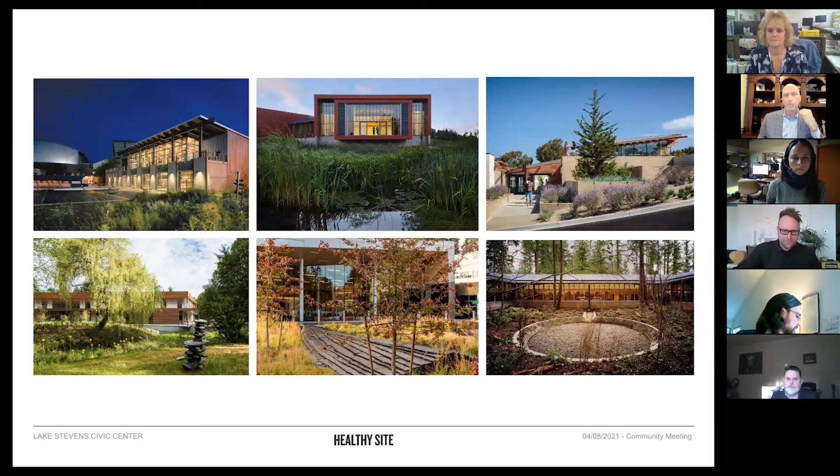And then finally, before I turn it over to Emily for a minute - how can we really open these buildings up, the library, the Civic Center, City Hall, for really 4-season use, at least into the shoulder seasons, fall and spring? How can we be outside under cover and enjoy that Pacific Northwest outdoors by having some big openings, as big as possible, to really spill out onto the outdoor plaza spaces?

So we're really going to be locating some public plaza spaces right adjacent to some of the key public spaces on the inside, so that we can mix the indoor outdoor use of the project.

And then we really spend a lot of time trying to put the right spaces right next to each other so that they can open onto each other where possible.

So if we have a big meeting room for the library - we're considering the hearth room, we're calling it - or the council chambers for the city hall, if those could be located next to each other or even completely shared in some scenarios, they could open onto each other and expand for the 1 or 2 gigantic events each year, but then size down and be right sized for the typical events that happen all the time.

So we look for ways to really open spaces up. Here's an example in a city hall where the council chambers opened onto a covered breezeway, and we were able to pull the glass doors fully open, and with speakers relaying the sound, we were able to expand the space by an additional 1/3 of the capacity for those big events.

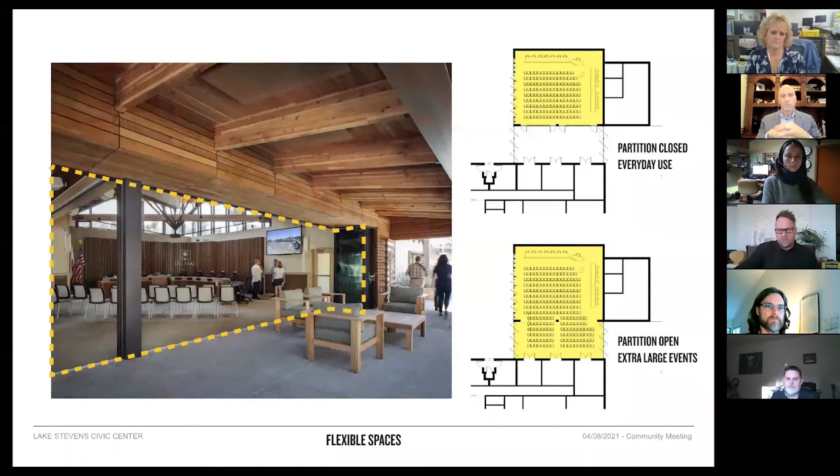Now, Emily's going to talk some more about the outdoor public spaces.

Hi, I'm Emily Van Gelderen with Site Workshop, and Clayton Bodwin is also on this call, and we are your landscape architects. So the outdoor space is a continuation of what's going on inside the building, with spaces available for both large and small gatherings that are both civic and educational, with opportunities to be playful where these two characters overlap. We're looking to increase the tree canopy throughout the site and create moments of pause, while also pairing the site's existing hydrology and geology with the pedestrian experience.

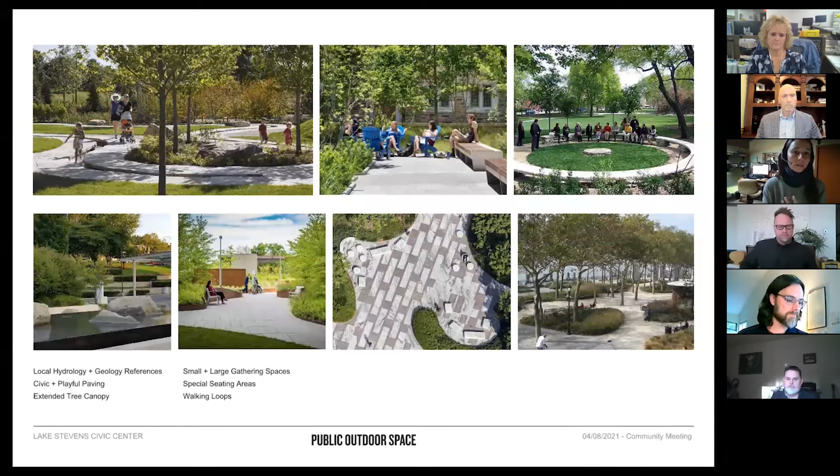We're really excited about the idea of weaving storytelling opportunities throughout the site, whether it's through materials, signage, art, or seasonal events, with the overall goal of the site being an available resource to the community year-round. We also hope to connect the outdoor space with the buildings so that for certain public programs or events, people could spill out from the building to the landscape seamlessly.

With the site's adjacency to an existing wetland, which we'll go into more detail on later, and its proximity to the lake, we're really interested in creating stormwater amenities or features that are visible, artful, educational, and seasonal. There's an existing stormwater detention vault on site that Mike will also highlight later. We plan to place these visible stormwater amenities strategically throughout the site to help reduce the stress on this existing vault, which will help with cost savings for the project in the future.

As you'll see, a lot of our site strategy is to limit impacts to this existing wetland. We're interested in this idea of weaving circulation paired with pause points that offer opportunity for play or learning for all ages throughout the landscape and throughout the year.

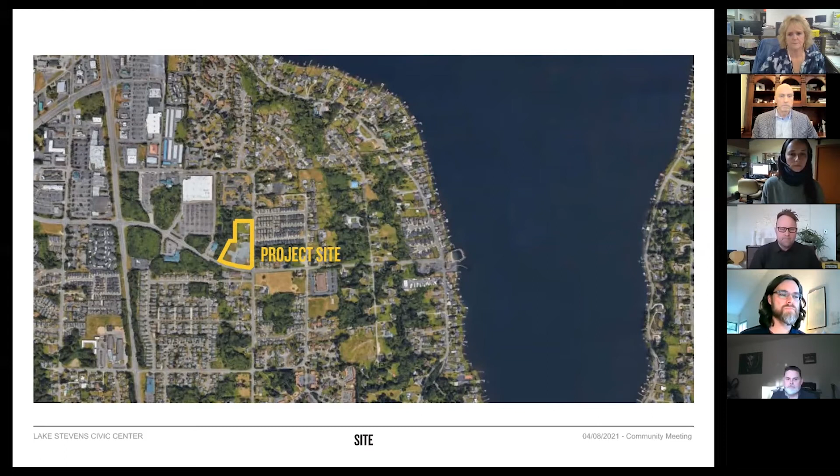The site you chose here is in a really advantageous spot. It's really holding down the west side of the lake. There's a great gathering space over on the east side, and this is really the great civic gathering space on the west side. It's just at the great spot coming off of Highway 9 where things start to slow down. You can really sense that tree canopy coming back as you head toward the lake.

These are some sketches we did early on when we were first interviewing for the project, thinking it through and looking at the position of this site in the greater context. How can this site be a gathering space on the west side that really blends that Highway 9 and center-of-town feel and eventually links down to the lake? How can we be at the cusp of those two and become the center that sews those two together?

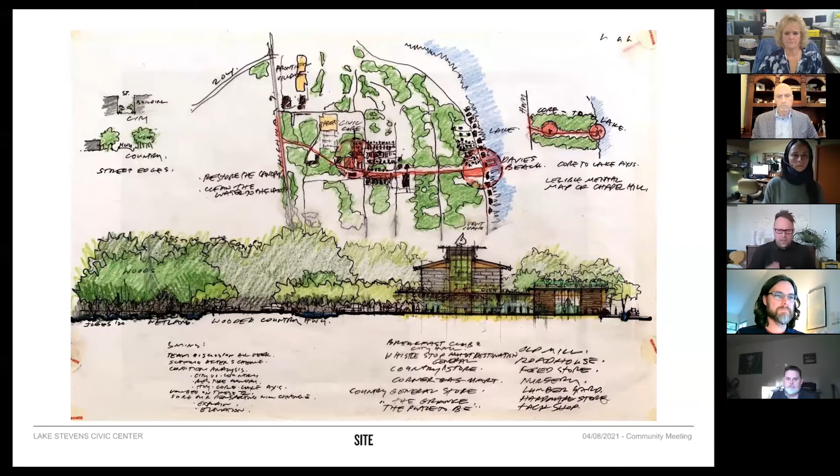The sketch on the bottom there is an idea of healing that tree canopy across the site again. It's been removed at some point. How can we really bring that tree canopy right back across and blend between civic and forest? This next sketch shows that concept.

How can we enhance that woodland? We've got a really good category 2 wetland on the site there—a great little piece of nature tucked onto the west side. We're required to enhance and protect it, and in some cases enhance it further. How can we take that opportunity and really grow that woodland across the site a little more, while at the same time creating a real civic presence? So we have to blend those two.

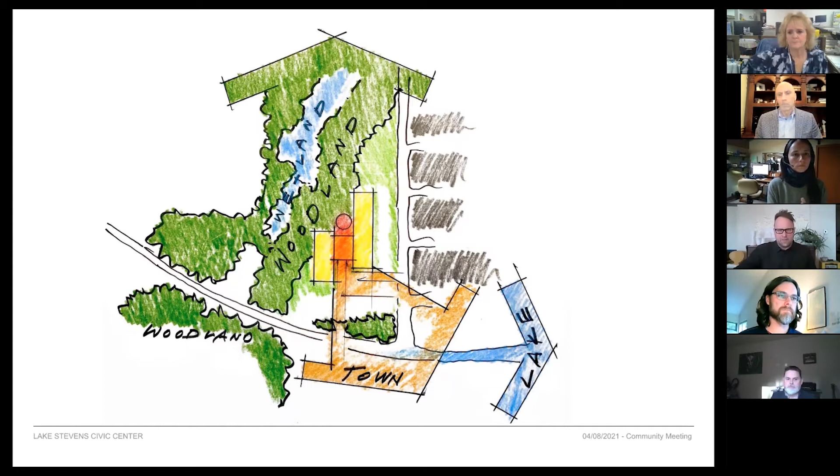From Market Place and 9, you'll be able to see these buildings, and they'll have a real strong architectural and civic presence, but they'll be couched in that woodland. From one side, you'll be really tied into nature, and on the other side, you'll have the sense of being in the middle of town, always aware of how close we are to the lake, and how we might reach out at the upper levels of these buildings to even potentially get some views over the lake and out to the Cascades.

Here are the site constraints summarized. The blue line on the left is the edge of the wetland that's been delineated most recently. You can see it's right there, hugging that west side of the site.

We believe the buffer we need to honor is about 110 feet away from that. We can build within that, especially in these disturbed areas painted red here where there's been some gravel put in. We can definitely build in those, but if we build into the buffer where it's still a little green, as long as we make up for that somewhere else on the site or mitigate it, we can do that. So we don't see that as a real constraint. We see it as an opportunity to bring that green across and bring that civic space into the woodland at the same time, so kind of blending.

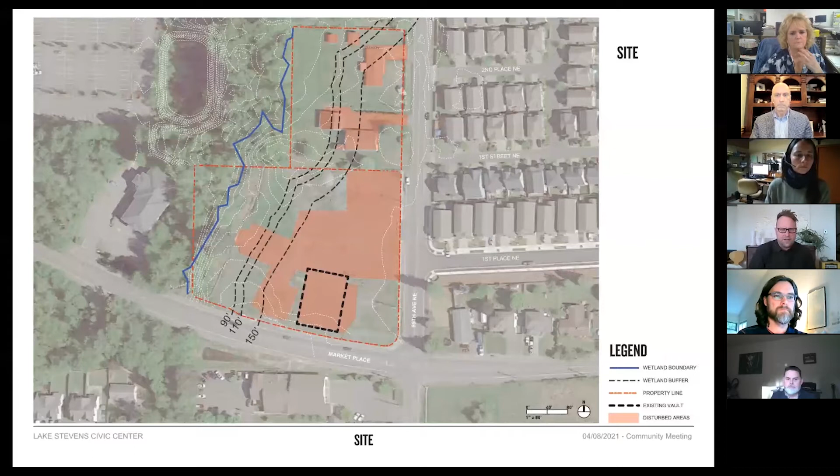That big rectangle at the south edge of the site is an existing stormwater vault. It's an underground concrete storage required to treat the stormwater on site. It's already there, worth a lot of money the way it's been built, and we want to reuse it rather than tear it down and build another one. So we're going to try to treat as much stormwater up on top of the site as we can, to take some pressure off that vault and hopefully make its capacity work without adding any other vaults.

So we have 3 site alternatives tonight we're going to share with you. We wanted to make all 3 very distinct in some way in order to bring up a certain series of concepts that we can discuss, that you can discuss as a city. Give us your input, and then we're going to blend all the best ideas from all of them into a preferred site alternative. That's ideally how it will go.

All 3 of these have a distinct approach to the site that all honor the wetland buffer and understand how we're going to mitigate any impacts in that buffer, keep the existing vault, and work with concepts where we're trying to reach into that woodland on one side of these buildings and reach out to form a real civic face on the other side.

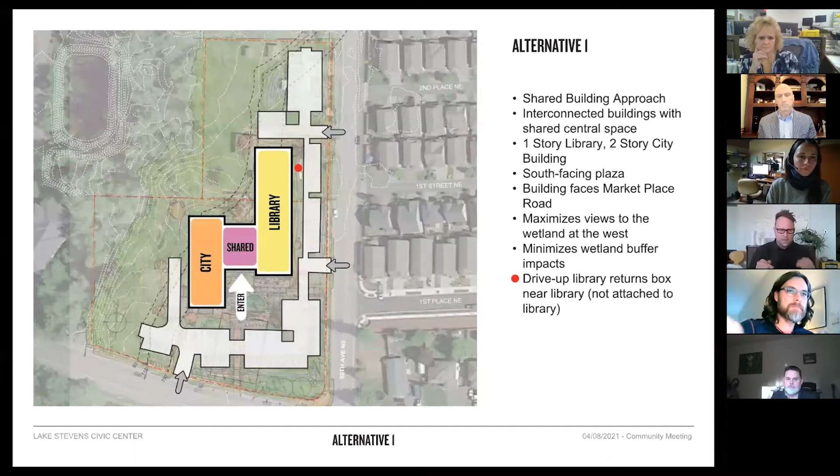We've got the parking lined along the south and east side, so it's easy access, uses potentially some of the existing curb cuts if possible, and really makes in and out access and fire access really simple. But we think you won't just be looking at a parking lot when you come in here. We're going to provide some green buffers to really mask that parking from outside the site.

So for all the site alternatives, the character images to the right can apply to each scheme, but the diagram to the left will highlight where potential collection of water and people could occur.

This building scheme creates the opportunity for a large south-facing gathering space paired with a more intimate gathering space to the north of the building. All of the stormwater is shed, collected, and treated along the street frontage, while there are smaller moments of play and learn weaved through the wetland buffer and adjacent to the library building.

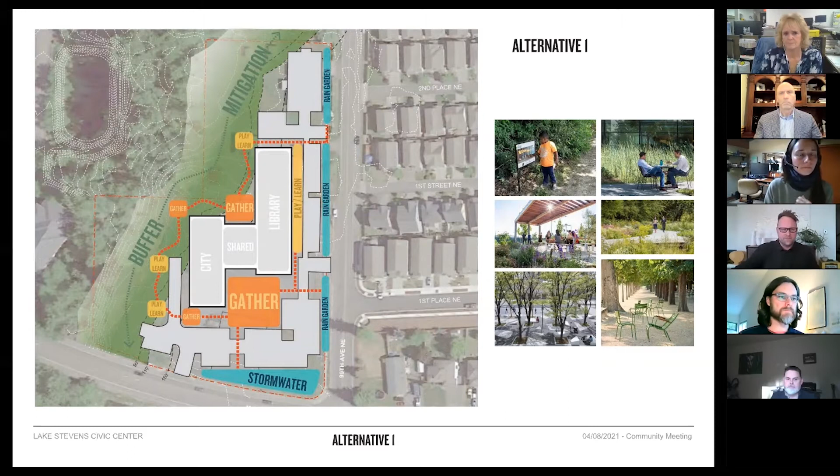And here's all that stitched together into a drawing that gives you a little bit more sense of scale and kind of texture and feel.

Just to give you a sense of scale, you can see the parking stalls down there. It's a double loaded parking lot, so imagine a little car in each one of those slots. The little dots walking in the front door are people, so that gives you a sense of the size of this and how it would feel out there on the site.

Showing that glacial erratic moved over here, if that's possible, we'd love to do it. It's off the vault, so it wouldn't be crushing that vault, which is the red rectangle under there. And maybe that would just anchor that corner of the public plaza and really make it a permanent space, a place that really means something to the town.

You can see we've developed this green buffer along the south edge here. Pretty key corner at the southeast, down at the bottom right of the site, where people eventually, coming up from the lake, if we could ever get a nice pedestrian link down there sometime, that'd be the place people would be arriving from. So we want to really welcome people on that corner and give them a couple of options for entering the site from there.

So maybe on the left there, a bridge over the wetland that safely crosses the parking lot, a raised area so that it's a safe crossing onto that big public plaza that can have 10 by 10 tents for farmers market or craft fairs or art fairs. You can have events out here that have nothing to do with City Hall and Library if the town so chooses. This is also a great place to meet somebody and sit out in the sun on a sunny day.

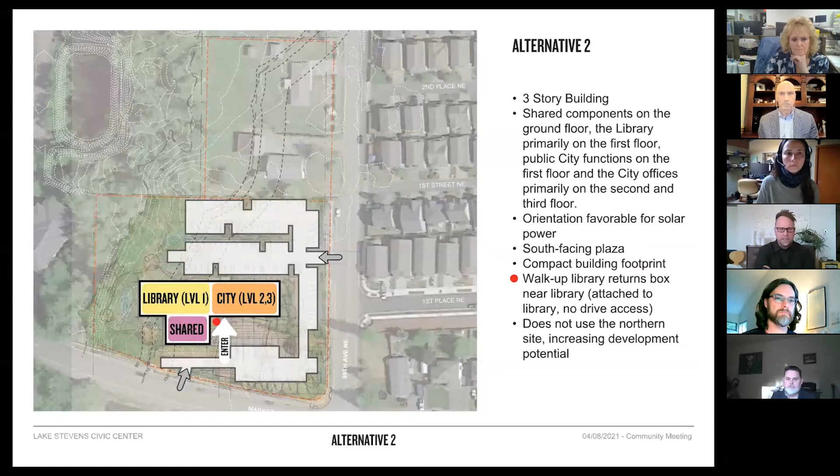The parking gets to be a lot more percentage of the site because we're so compact. So we have a little bit less chance to bring some of those bigger green spaces across, but we still have some chance, we can still blend it. Let's see what Emily has to say about the site part of this.

Yeah, so as Mike mentioned, the more compact site design has the building and the parking lot taking up a lot of the site. However, there's still the opportunity for a large gathering space that's south facing, that's also facing kind of the city gateway in the front of the building, as you can see in that big orange rectangle.

And then there's still an opportunity for a smaller gathering space on the woodland side related to the library and the shared space. And there could be opportunities, like in alternative one, for these play, learn, pause points throughout the buffer.

In this scheme, we're shedding the parking lot to 99th and to the center to kind of treat and hold that stormwater and rainwater. And because this building is taller, on the corner of Market and 99th we're trying to screen it, so you're seeing trees connecting to the buffer behind the building.

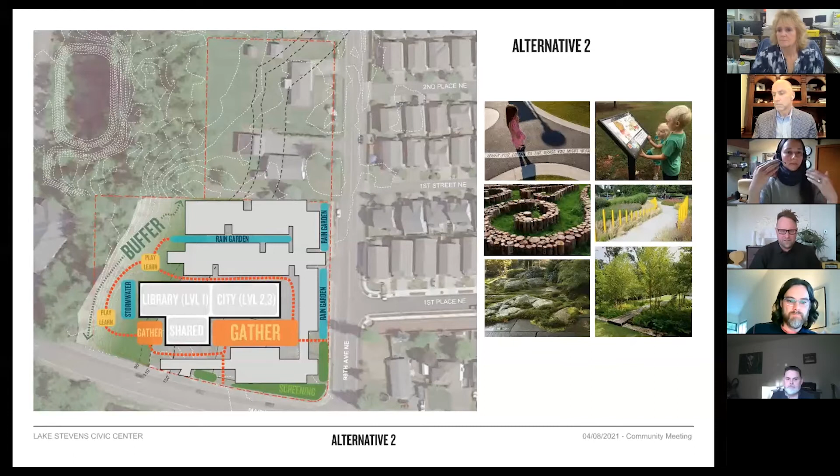And here's that sort of texture drawing of this scheme, so you can kind of see a little bit more of the scale and how it might feel out there. We haven't studied the architectural expression at this point - we're really looking at site strategies right now.

So later we're going to come to you with the preferred alternative and give you a sense of what it might feel like to walk up to this building. At this point we're not at that level - we're really just trying to look at it from above and understand how it fits on the site.

As you can see here, that shared space, that kind of bump out on the south, on the lower part of the bar there, that single story space, that could be the big meeting rooms for a city and library. And potentially they could be right next to each other and open onto each other.

We think we could do that in the other scheme as well, alternative one. But those rooms can really open out onto that kind of forest outdoor space Emily mentioned on the left, that circular space, or out to the main public plaza on the right. So that really gives us a chance to open this thing up and make a real flexible combination of space. You can enter this building from the north and the south.

So if you come by foot, you might enter from the south, coming off the bus stop there, or by bike. If you're coming by car and you're going to park, most of the parking is up on the north, so you might want to enter from that north side. So we've looked at and contemplated a two-way lobby there, and that gives you some flexibility for entering the building.

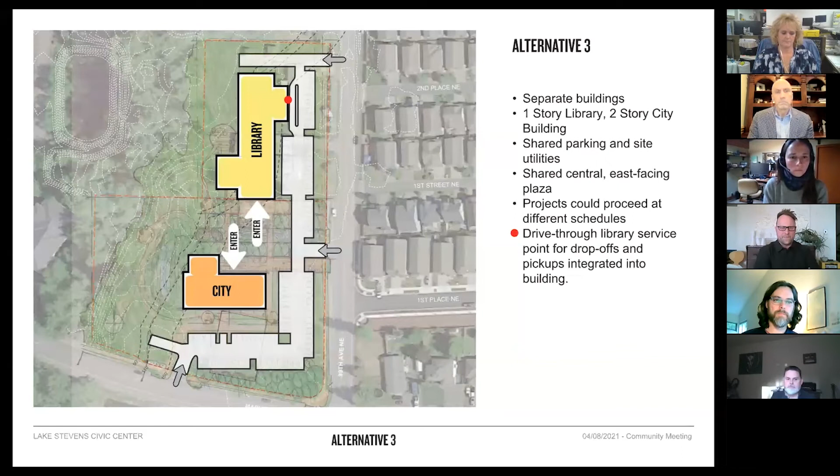So even though they're separate buildings, their central gathering space could be shared, and it's quite a big space here that could be pretty dynamic, where we mix in some rain gardens, we mix in some of the site geology, and it's just the same idea of this large gathering space that connects to both of the buildings. We have an opportunity to the north of the library on the woodland side to create that smaller gathering space related to the library programs. And here we still have the idea of screening the corner between 99th and Market, and also the idea of more connected play-learn spaces within the buffer. And because we're using all of the site, there's just more kind of site amenities available to us.

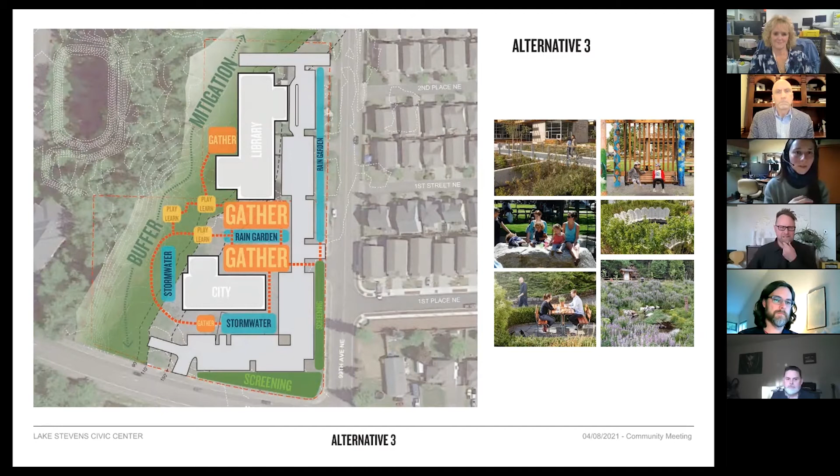And here it is all kind of stitched together. You can kind of see this is indicating the idea of a mix of public outdoor spaces in between the two buildings, stormwater infrastructure, and green space. So it's kind of a blend of all those. You know, the final design will probably look different than this, but the idea is that all three of those aspects are mixed in that central public area. You can kind of see how it leads out into the woodland and then feeds people in from the city side on the east side. So it kind of blends a civic space with that green space pretty well between there. You'd be able to see between these buildings into the woodland. That's an aspect of it we thought was pretty great.

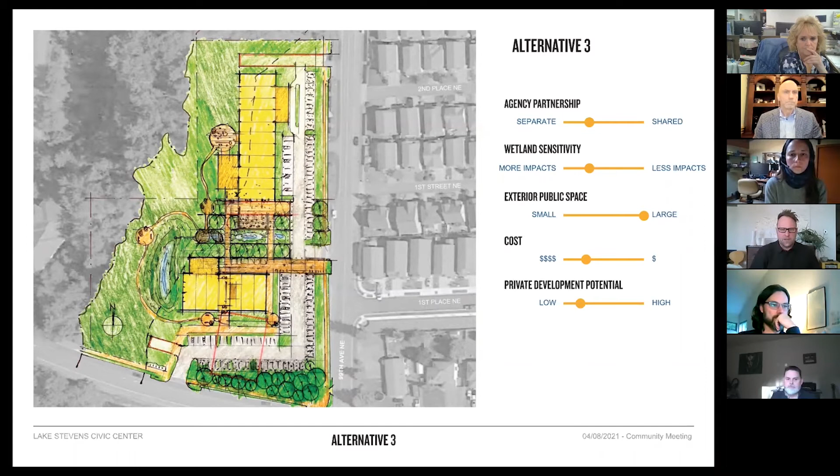The dials here, this one has the least amount of agency partnership. It's got some because of shared parking and shared stormwater, on-site stormwater amenity. Wetland sensitivity, this one impacts pretty significantly into the wetland. But because we're using both sites, we have plenty of room to mitigate that and replant that buffer area.

Great big exterior public space. This one has some good south-facing sunny side on the north edge, where sun would come over the city hall and make it out to that north side. Some of it will be a little bit shady though in the middle of the day, from the shadow cast by the 2-story city hall. So there's a little bit of something we need to work through there to make sure all that space was usable on a sunny day.

This one, because it's 2 separate buildings, has a little bit higher cost, a little bit more skin area. They're not sharing as much in terms of mechanical spaces, but like I said, all 3 of these cluster pretty closely on cost, and you'll see that in a little bit.

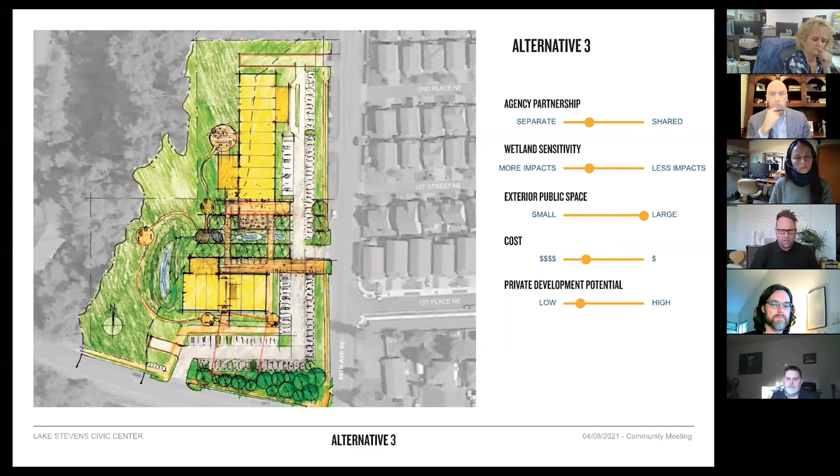And then this one has really the least amount of private development potential. We think we could carve out some small corners of this, maybe where the green buffer is at the south edge, or up in the northeast corner, where we could establish another small retail space or cafe or something like that, but nothing along the lines of a big private development of more housing or something to that extent.

So this is a sheet we made that we kind of see as your cheat sheet. When you come in and give us comments on the survey, everybody might want to use this sheet as a great way to really compare these three and look at them all in one place. So we kind of end our design presentation with this, just to see them all together at one time, and encourage you to do that when answering the survey.

Please let us really have it in the survey. Tell us what you really think, what you really liked, what you didn't like, and try to be specific. It's really going to be helpful to our team. We don't live there — I grew up in Woodinville, not too far away, but we don't live there — and we want to hear from you who live there what we should really be doing here to make this just right and fit just right.

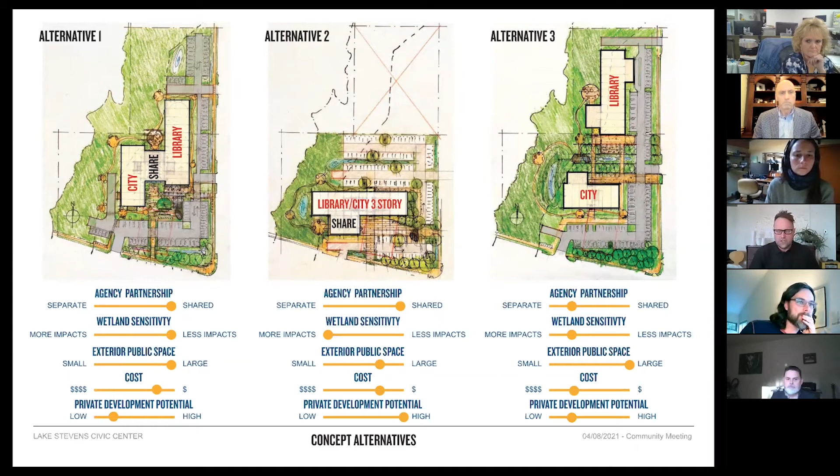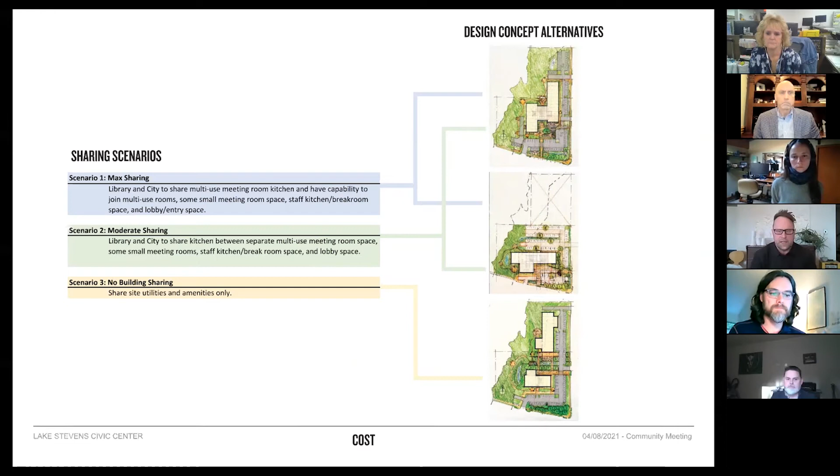Yeah, all these scenarios, just to point out, alternatives 1 and 2 contemplate some sharing between the library and City Hall, which we think can make a more dynamic space and save on costs where possible. Alternative 3 really doesn't have that ability; they're two separate buildings operating independently. There's some advantages to that independence and some disadvantages in that we can't share as many of the spaces and cut down on the overall square footage.

Thank you, Mike and Emily. As I mentioned at the start of the presentation, we comprehensively evaluated the various public-private partnership, or P3, opportunities — specifically the various delivery approaches to construct a quality project at the lowest possible cost to the public. We've developed these cost estimates for the project being delivered more on a private sector delivery model than the traditional design, bid, build method. The private sector model is very collaborative between the developer, the designer, the contractor, and the owner, and its structure allows it to achieve a lower cost. The delivery approach we believe can achieve these lower costs would be a progressive design build delivery approach, financed using tax-exempt debt authorized by IRS ruling 6320.